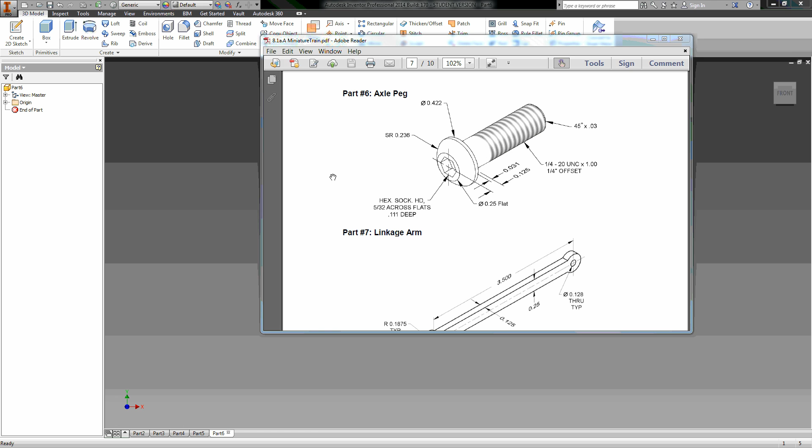So I'm going to go ahead and create a sketch. There we go. I'm going to take a line tool. I'm going to kind of come over, go up, come back over, go up again a little bit, angle over, make this flat piece across the top, and then come down and make that shape right there. All right, so that's my overall shape. And then what I'm going to do after I dimension it, I'm going to take this line out and put an arc in there. So I want to go ahead and start getting some details on this.

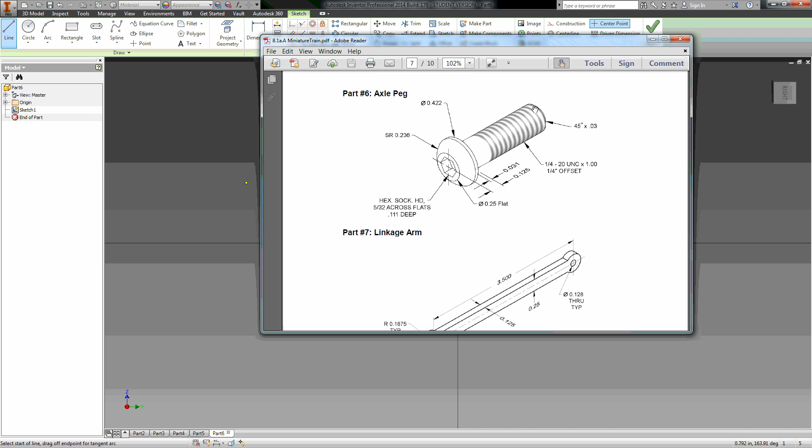So when I look at my peg here, if you look, it says it's a 1/4-20 UNC, so it means it's a 1/4 inch diameter on this. So the bottom of this is going to be half of that 1/4 inch diameter. So I'm going to dimension this piece down here at the bottom to be half of that, which is 0.125, right? So I'm going to set it to 0.125, and that's 1/4 inch right there. So when I revolve it, it's going to give me the 1/4 inch across the bottom.

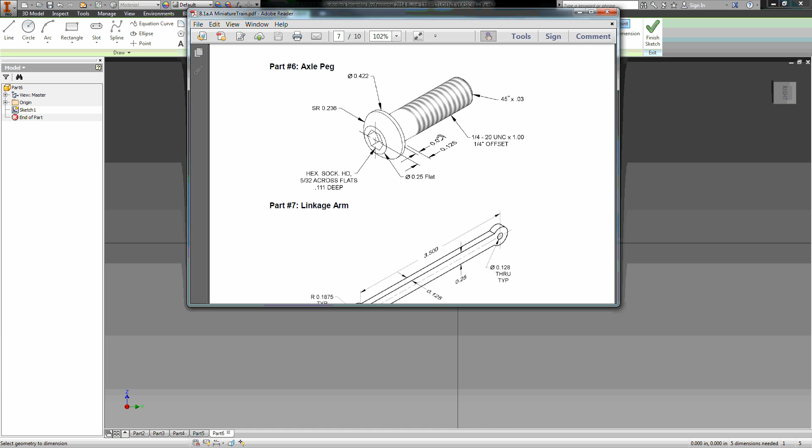Now, if we look at this, it also tells me it's quarter inch 20 UNC, so it's threaded times 1 inch. So the threads are 1 inch with a 1/4 inch offset right there. So that means this whole section is 1.25 inches. So I'm going to go ahead and dimension this piece to be 1.25 inches. Okay, but look how that screwed everything up. So I'm going to go ahead and come back. I want to get these pieces set first so it doesn't mess that up.

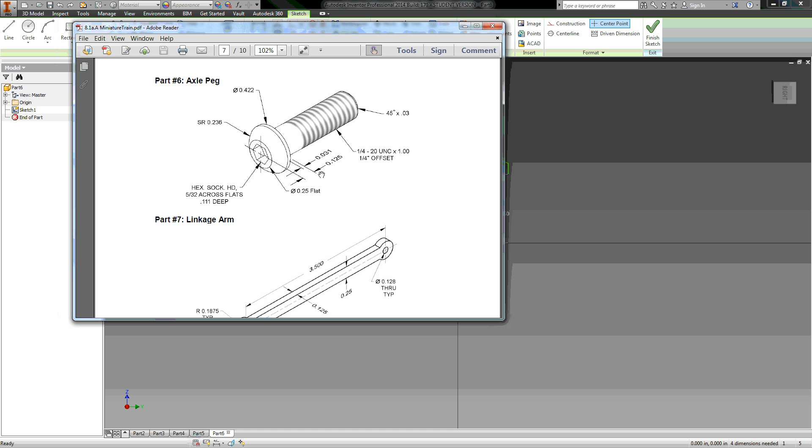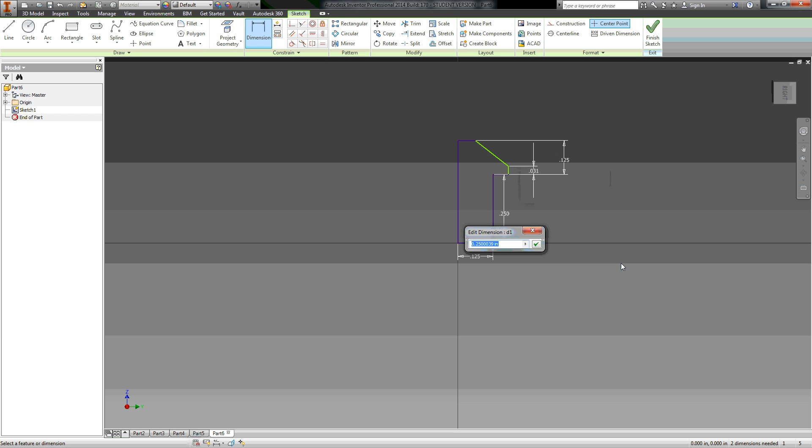So if you look, this little notch right here is 0.031, and then from the bottom of the notch to the flat section is 0.125. So let's set those, and we'll come back and do the other one. So this piece here we said was 0.031. Okay, and then from here to the flat part is 0.125. All right, so I set those. Now I can go ahead and come down here and set this to 1.25, and it won't mess everything up. So there's the way it looks now.

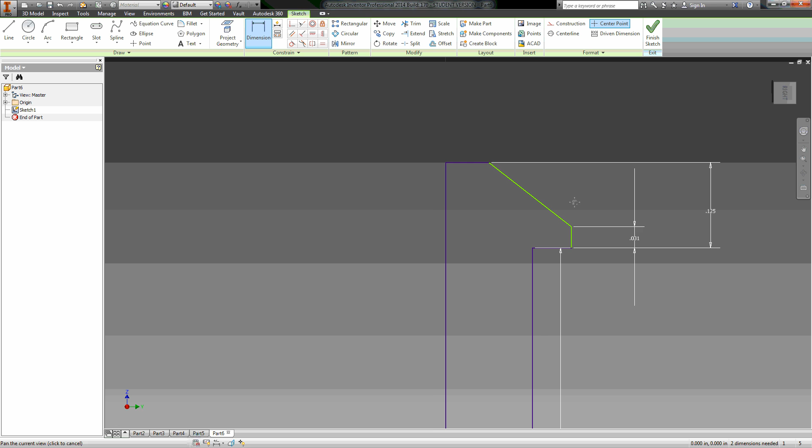Okay, so I have the overall height of this thing. I got the height of this, I got the depth of this, I got this little notch here, I got this piece right here. But how big is this flat area? It tells you it's 0.25 on the whole flat area. So that would be my diameter. So I want to set my radius then to be half of that, right? So 0.25 divided by 2 is 0.125, right? And there's that flat area across the top.

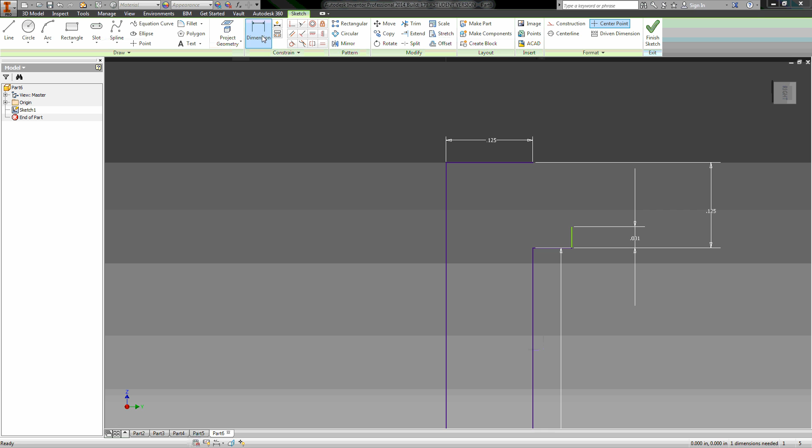Now that I have that set, I can go ahead and delete this piece out, and we're going to put an arc in there. But if you look, it tells you the surface radius of this whole thing is 0.236. So that's my radius that I need for that arc. So I'm going to go ahead and put a 3-point arc. Click on the end of this one, click on the end of that one, and I'm going to type in 0.236, and it gives me the arc that I need right there. And now I can go ahead and revolve that around and get the shape that I need.

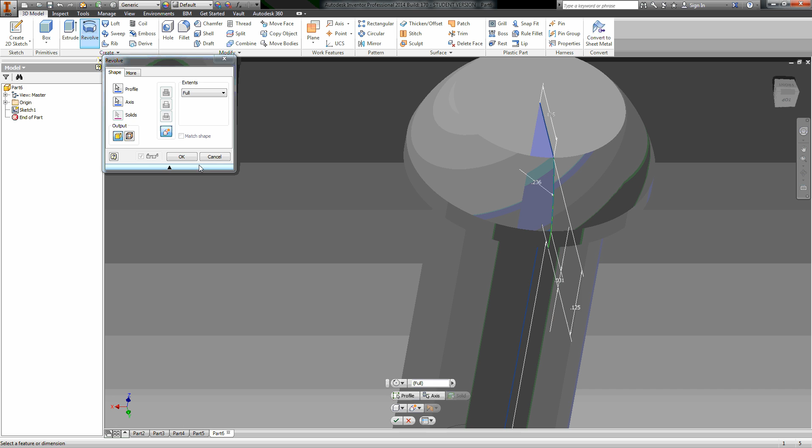So I'm going to go ahead and hit a revolve. There's the region I selected. I want to pick that for my axis. Okay, and if you look at it, it looks kind of like the peg that we need. Hit OK, and we have it. Okay, sorry about that.

So the next piece that we need is this little opening right here, and then we're going to get the threads, which both are pretty simple to do. So this is really just a hexagon right here, a regular hexagon, and it tells you it's 5/32 from here to here, and it goes in 0.11 for the depth.

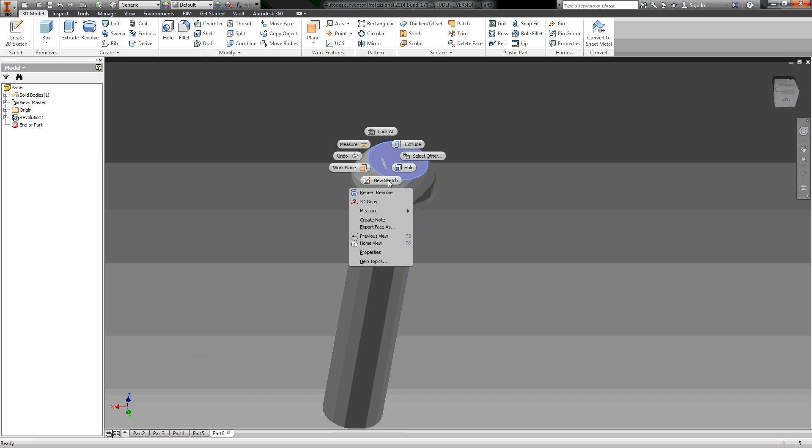So what I'm going to do is I'm going to make a sketch up here on the top. I'm going to go ahead and grab the polygon tool and change it to a hexagon, and then I'm going to click on this center because it's centered, and I want to flatten it out, something like that. And if I want that to be flat across, let's use my horizontal constraint. Click on this. There it is, nice and horizontal.

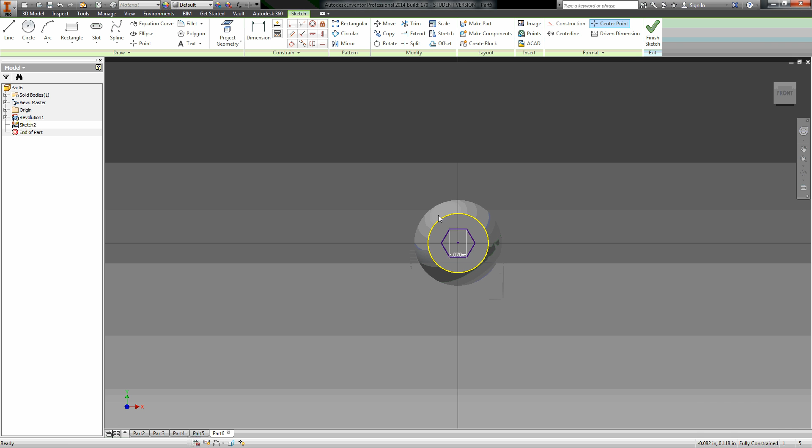And it was from here to here. It said it was, oh, my bad. Let's try that again. All right, so from this flat to this flat was supposed to be 5/32. So I'm just going to do 5 divided by 32. And there it sets the size for me, 0.156. I finish it. And I go ahead and do my extrusion.

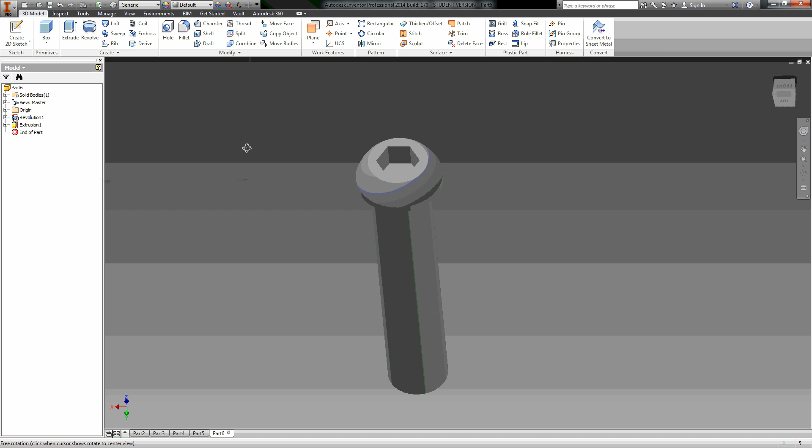I pick that region. Again, I want to do a cut right here. So I'm going to do a cut, and the depth of this thing was supposed to be 0.111. And now when I look at it, there it is. There's my depth. Now all I got left to do is put my threads on here.

So we have a feature up here called thread right here. I'm going to click on thread, and it wants me to select the face. So I'm going to pick this face, and if you look, the threads are going all the way up and down it. Well, it wasn't supposed to be full length. It tells me on this thread here the threads are supposed to be 1/4-20 UNC, 1 inch in length and an offset by 1/4 right here.

So I need it to be 1 inch in length. So I'm going to take off full thread and switch to 1 inch in length. And if you look, it's already going the 1 inch in length that I need. If yours is maybe something like this, then you just got to hit the little arrows right here. It could be possibly down here and you can't see it. Just change the direction of it. And you can also mess with the offset if you need to.

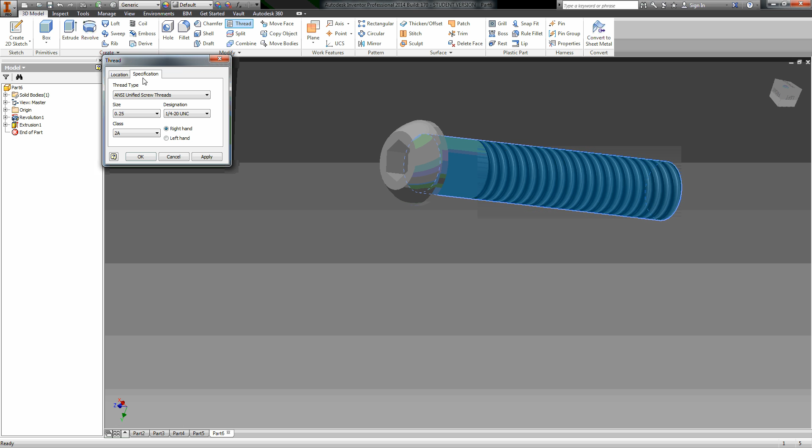And if you look at my specs over here, my size is 0.25 and it's already a 1/4-20 UNC. So I'm going to go ahead and hit OK right there. And let's see, last but not least, the only thing that we have left on here is it tells us down here that we have a 45° times 0.03 for my chamfer.

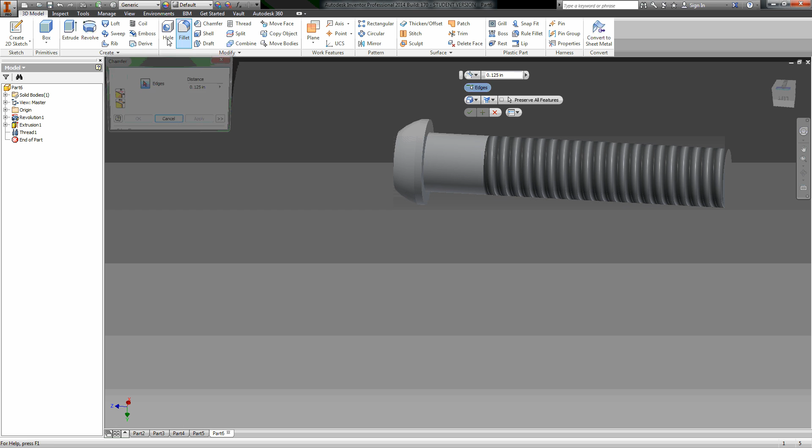So I'm going to go ahead and come over here. I'm going to rotate this around a skosh. I'm going to tell it I want to do a chamfer, and I want to do a 45° chamfer at 0.03. Okay, it wants me to select the face, so I'm going to select that face, and it wants me to select the edge, select that edge, and I'm going to check it off. And if you look, there's my chamfer down there at the bottom.

And that's how we make this. All I got left to do is come up here and switch it to ABS plastic and change the color, whatever color you want it to be. And that's how you make this part. Hope that was helpful.